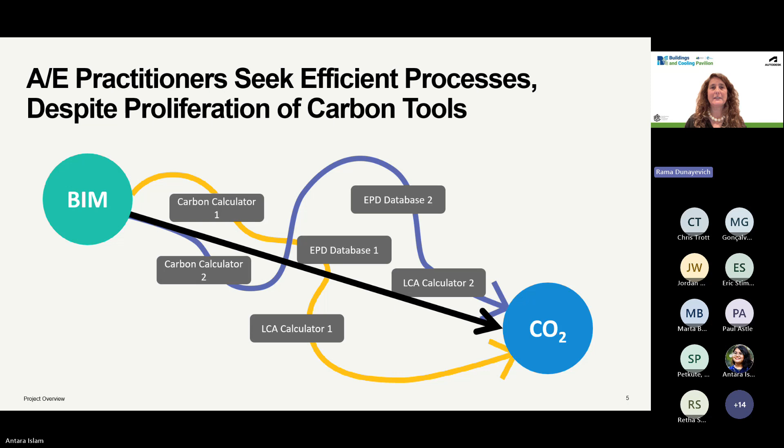Now to the specifics. Architecture and engineering professions are looking for the most efficient methods to connect BIM models to embodied carbon. Today we have many tools, data sets, and calculators, which result in many paths you can take to get to BIM to carbon assessments. However, practitioners really just want an efficient, streamlined path to get from A to B, not to explore the many paths that exist in the industry.

Which brings us to this project, which we developed, as I mentioned, under the auspices of the WBCSD. First, we developed a proof of concept to unpack the various ways that these 6 global architecture and engineering firms approach embodied carbon assessments and measurement. By analyzing the same Revit BIM model and sharing the details of their specific workflows and processes, we discovered opportunity areas for better alignment across the firms. And building on that discovery, we're excited to share our learnings with you and the industry today.

I just wanted to give a little context also to the WBCSD, the World Business Council for Sustainable Development, and I'm sure you'll be hearing from them many times during COP. It has a membership of about 250 companies, and those 250 companies represent about 25% of global greenhouse gas emissions. So the opportunity to work together with members and non-members to do this project was incredibly important.

You've seen the companies involved, but we also wanted to show the people behind the work. As you can guess, this was a massive effort across multiple stakeholders, across multiple geos. You'll hear firsthand today from a subset of this terrific cohort, comprised of some of the leading experts in decarbonization. This level of expertise is exactly what's needed to help collect, synthesize, and extract the data needed to formulate best practices that will help not just those in the cohort, but all of you working in the industry.

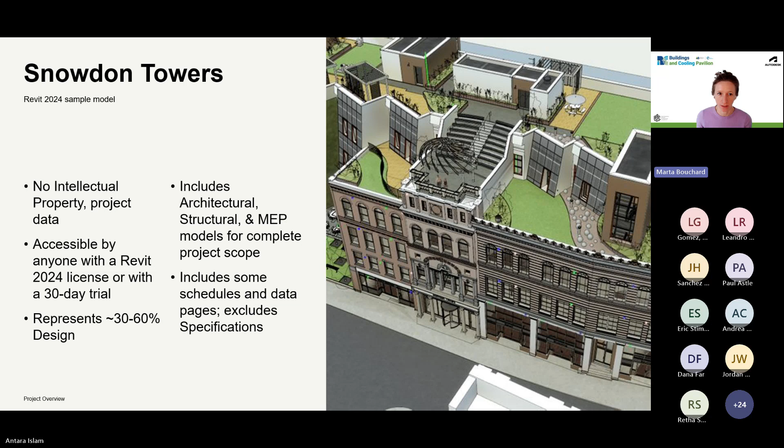So let's jump into the work. In order to achieve the outcomes we're about to share, we did need to ground our work in real models and real workflows. So we decided to use the Revit sample model called Snowdon Towers for several reasons, which you can see here. Although we selected a Revit model, our findings can absolutely be applied to any BIM software.

We also needed to align on a reporting framework structure. And for this, we used the Royal Institution of Chartered Surveyors, or RICS, Whole Life Carbon Guidance to structure the carbon assessments you're about to see. This provides a real industry use case for the carbon data being extracted and assessed by this group. And just like with the BIM modeling tools, our findings are actually agnostic to any specific reporting framework and could be applied to any reporting structure.

So we get into the fun part. What did the results of our efforts find? Here's a quick recap from the initial proof of concept, going back in time about a year and a half.

As a summary, we see each of the cohort's firms represented as a single approach on this view, where the y-axis is a measurement of embodied carbon for just the structural scope. I want to be clear, this is not a whole building. It was structural systems which were selected as high impact carbon scope.

Each of the bars here corresponds to the RICS categorization of reporting data. We have 7 approaches because one firm actually applied 2 different approaches to the data, resulting in slight variations even within a single firm.

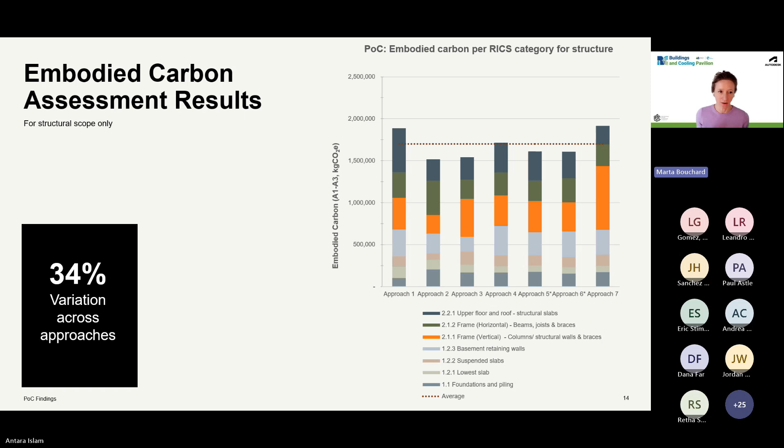Now, what we found is a 34% variation across the results. If you zoom out from this, you can imagine how this has a huge implication for carbon regulations that rely on benchmarks, carbon intensities, and corporate commitments to net zero, which rely on offsets or other things for carbon impact factors.

Now, what you see here on this slide is last year's resulted work, where we have 6 key areas of discovery explaining why we saw such divergence across the 7 approaches.

We identified key elements of an embodied carbon assessment process: the fact that the data structure maps from BIM software to a reporting framework, variation in identifying the spatial boundary of what is even assessed, how a model can be post-processed and then fed into material takeoffs, assumptions made around non-modeled elements, and different approaches to selecting embodied carbon factors.

So this was the baseline of all of our learnings. You can read this report, the first report, for details, but this is critical. It serves as our jumping off point for phase 2, which you're about to hear about.

We are going to go deep into the how. We went back, we interrogated our work and understand what caused that 34%, and we want to better understand our processes and workflows so that we can seek alignment across our firms and design best practices. With that, we're going to jump right in. What can we do to reduce the variation?

Welcome to phase 2. We're taking those learnings from phase 1 and moving into phase 2, which goes deeper into the disparities in finer detail so that we can get recommendations and guidelines for you all.

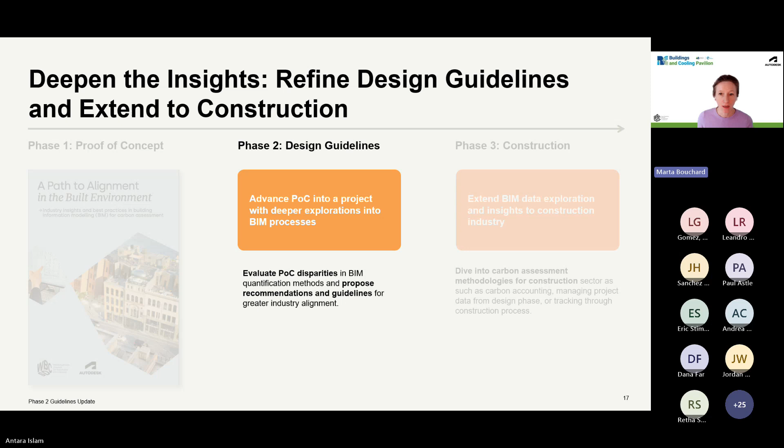So kicking us off, we are going to talk about the why in this variation, and we interrogated the root causes for the variation I just presented. And we're going to introduce guidelines for how practitioners can get started in BIM on the right foot and with the end in mind.

Today, we've structured our findings into 6 categories of recommendations, and if you listen very carefully, you'll actually note that while we tried to create clean categories, not everything fits neatly into each bucket, and there's going to be some overlap and recurring themes.

And while everyone collaborated across all themes, each firm is presenting one of them today. We'll be handing off, and I will be teeing up each section according to these 6 as your moderator today.

Starting with the first section, preparation for carbon assessment. What can we do at the beginning to prepare for a carbon assessment? So in phase 1, we focused on a use case.

We looked at carbon phases for scopes A1 to A3 for a fairly detailed model. But if we extrapolate to multiple use cases across many phases of a project, it introduces even more potential for variability. So to get started, here are the guidelines that can help you set your path to prepare for carbon assessments. And I'll hand it over to Sandra.

Thank you, Marta. So we begin this section with a focus on preparation, because how we frame and scope an assessment directly shapes its consistency, transparency, but also its outcomes.

So while our cohort teams understood carbon scope really well, we still saw differences in how spatial boundaries were set and how non-modeled elements were handled.

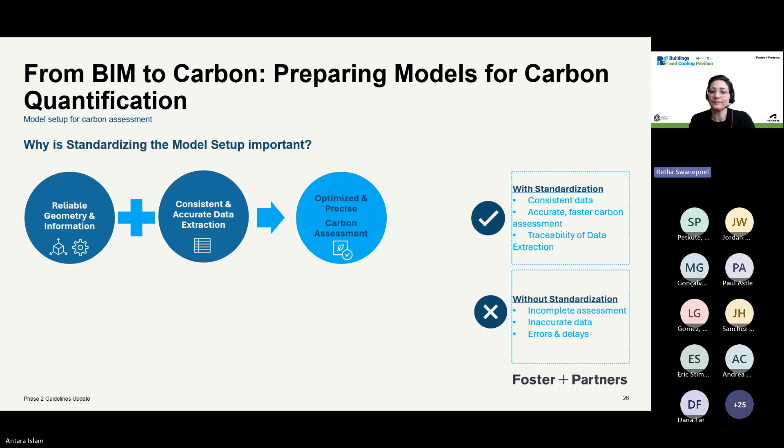Next, please. Before we dive into explaining the model setup process, it's important to understand the broader context of the BIM to embodied carbon assessment workflow. It consists of two key stages. The first is model setup, which takes place inside of the BIM environment, and the other is post-processing, which occurs outside of the BIM environment, but is highly dependent on the accuracy and quality of the model setup.

Now, focusing on model setup, this stage includes data integration supported by an iterative QA/QC process for both geometry and metadata. Once the model is verified, we move into setting up a data export template, preparing information for post-processing.

But before integrating any data, it's essential to define the scope of the carbon assessment, as Margarita said. This is typically managed through filters or custom parameters, enabling easier visual inspection and scope clarity.

In line with the model element responsibility matrix, any placeholder element from other disciplines can be placed on designated work sets. This allows for better model quality control during early design stages.

All integrated data should follow a standardized structure with uniform naming conventions, hierarchical consistency, and complete 3D geometry. This also includes correctly assigning both predefined and custom parameter fields, such as consistent naming of families and types, clearly defined materials, and accurate element buildups.

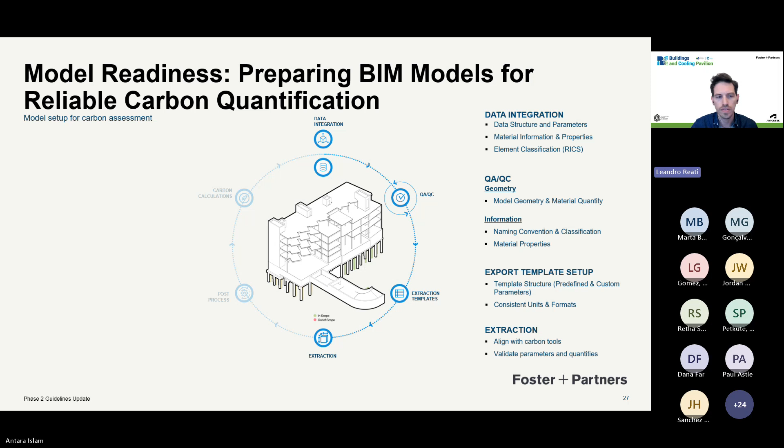In conclusion, to achieve and maintain a reliable carbon assessment, two things matter: geometry and data integrity, through consistent geometry, accurate materials and quantities, and consistent data tagging. And this leads to the second important thing, which is export integrity, where gaps and errors are detected early, data is verifiable and traceable to source, and exported data is validated.

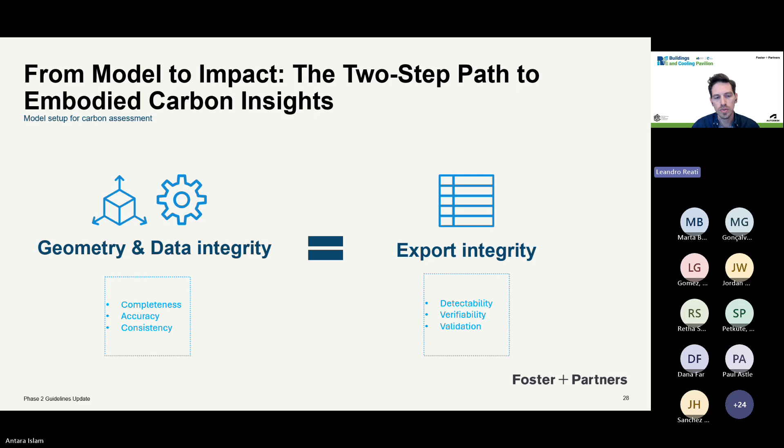Thank you. The final important matters about the model setup for carbon assessment are the model's federation strategy and the export templates. In daily practice, one of the main challenges of exporting data from digital models is dealing with large and complex project scenarios, where the federation strategy involves multiple models shared across different disciplines and several stakeholders. Each design branch may also have further breakdown according to the area of the project or its subdiscipline.

In the case of the structural engineering field, for example, a common subdivision of the model is according to macro groups, such as the roof model, the superstructure, and the substructure. Here comes the importance of having a good export template.

Ideally, it is a Revit schedule where you collect the important and relevant data that you need for the carbon assessment. As mandatory parameters, we would recommend, at least as good practice, the RICS categories in order to facilitate the mapping according to the report framework, the materials assigned to each element, and the quantities, in this case the volume, which will be automatically calculated from the software.

So, in conclusion, why is it so important to have an efficient export template? Because the main reason it ensures a structured, consistent, aligned dataset, and it is also a good chance to run a final check and make sure all the information provided is correct before the final export.

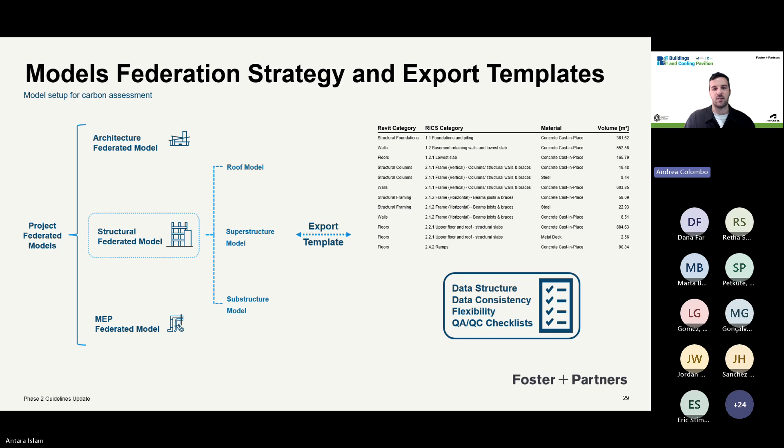One large area of discussion identified in the first phase of this work was the fact that some elements in the model would appear in multiple discipline deliverables, such as architectural and structural. This creates a gray area of which model to defer to, especially if that's not addressed clearly and transparently across project stakeholders. I'll hand it over to Eric from SOM, who will talk about exactly why this is tricky.

It's fairly common for elements to be modeled more than once, so let's get that out of the way up front. It's going to happen in your project. It could be different disciplines or even within different models from the same discipline. As Marta mentioned, we found this to be true in the models we used for the POC. Obviously this is a problem if we intend to use the quantities from the models for things like cost estimating and carbon accounting.

As you've already heard, the setup of a project is important. It will provide a framework for the team to do things the right way. One of the things they need to be prepared to do is deal with overlapping elements. So first, know that this is a common problem. In some cases this will be pure duplication of elements, and in other cases it will be a partial overlapping. Both of these are problematic, and I'll show you a couple of examples in the next slides. But regardless, you need to be aware that this is going to be a problem at some level on your project.

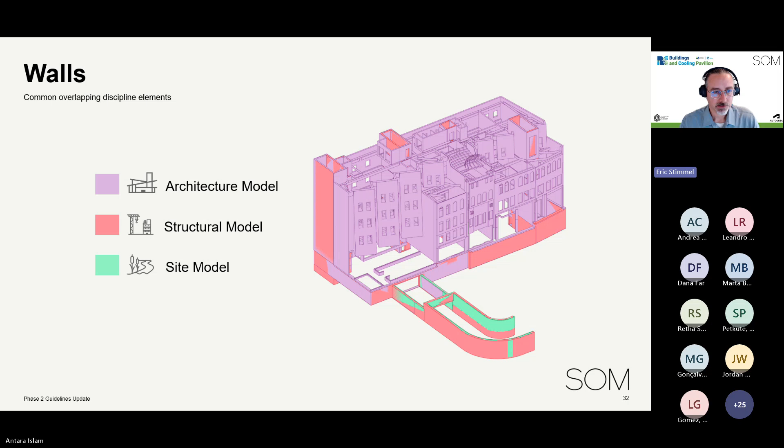In our sample models for Snowdon Towers, there were notable overlaps for walls between architecture, structure, and the site model, as you can see in this colored view. In some of these cases, these were exact duplicates that were easily filtered out, but in other cases, like the entrance to the underground parking, these overlapping walls were different thicknesses by 6 inches. So some care has to be taken to use the right walls and to understand if the difference is significant, and it should just be accounted for in a different category.

We also found more irregular overlaps for floor elements between the architecture and structural models. These were cases where the intent of the architecture model seemed to be to show the floor finish, but the floors also included the structural slab. So these compound elements have to be discounted as part of a quantity takeoff. Although there weren't overlaps with the site model per se, there were floors in that model, and there was even a floor in the electrical model. We didn't see many of these in this set of models, but non-structural equipment pads and sometimes walls can show up in other discipline models, which needs to be accounted for as well.

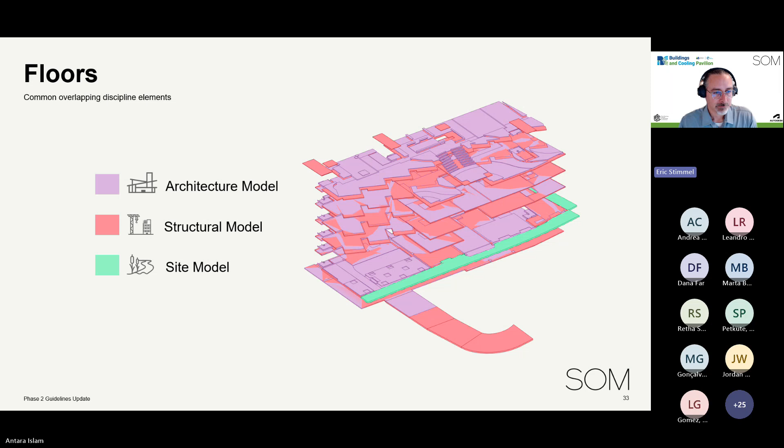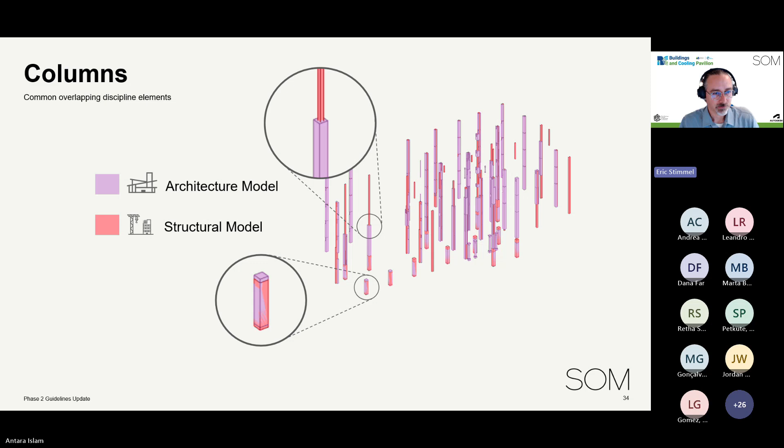We had overlaps of columns between the architecture and structure model. In many cases, the architectural columns are furring around the structural columns, and both needed to be accounted for, just not as columns. But in other cases, these looked like duplicate elements that should just be excluded from a quantity takeoff.

So of course we want to avoid this issue as much as possible and only have one party model each element. Fortunately, we already have a strategy for this in the form of the model element table. This is an example of the AIA document, but you'll see this in other forms on other projects—we have the same concept. We could even take this one step further, and in addition to identifying the model element author, we could identify a carbon data responsibility column.

That would help emphasize the importance of this data and allow for these two things, the model element author and the party responsible for the carbon data, to be untethered from each other if needed. So there are plenty of strategies for working through this in the models, and we've seen a couple of simple visualizations using built-in features of Revit.

I would strongly encourage visualizing this in the model with filters or something like that. This is what models are good for, but there's also other ways to check for duplicate overlapping geometry, including warnings, interference detection,

third-party add-ins. But clearly identifying the responsible party is going to take you a long ways to clarifying this information. So while floors, walls, and columns are particularly notable, other elements could also be double counted if we're not careful. So here's a short list of elements to pay particular attention to. Thank you.

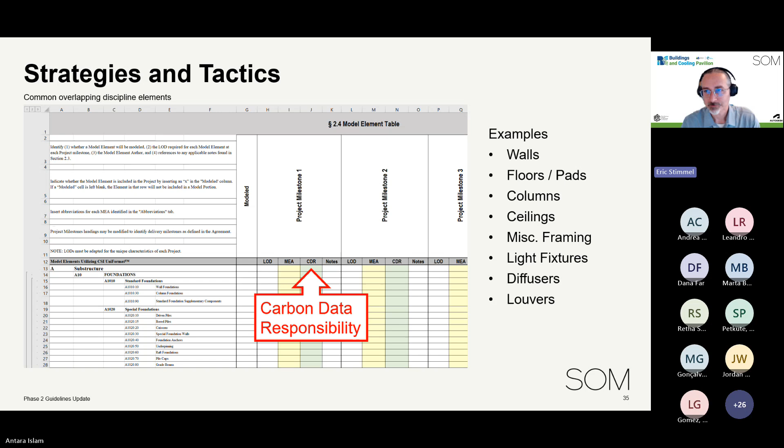So this group discussed non-modeled elements at length because we know there are several reasons elements may not be digitally modeled, such as the rebar in concrete or the studs in walls. When there is no element representation in a model, that introduces room for interpretation, assumptions, and therefore variation. You're now going to hear from Ramboll to discuss some guidelines for how to address common non-modeled elements.

Thanks, Marta. Yes, so we've heard about what happens when you have more than one element, but now we're going to talk about when they're not modeled at all. So just to define what we mean by non-modeled elements, we're talking about any material or component which is present in the actual construction but hasn't been captured in the model.

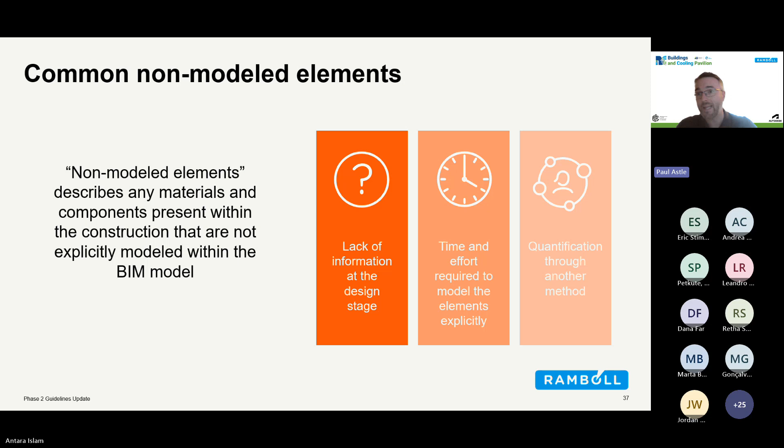And there can be a variety of reasons for that. There may not have been enough information at that design stage. It may take too much time and effort to actually capture those elements in the model. It just may not be worth it. Or indeed, it may be already assumed or planned that those things will be captured through a different method. So many different types of reasons and many different types of elements are within this category.

So the issues that we have as a result of that is that these elements can account for quite significant quantities of materials. We'll hear a bit more about that in a second. And as a result, they can be overlooked from carbon assessments altogether. It's quite difficult to know what's not there if you're not expecting it, of course.

And then when it comes to the actual pitfalls, one of the key issues that has to be addressed is who's responsible for these elements. We just had a great example from Eric there about identifying who's looking after which elements, but we also need to identify who's not modeling those elements, if that makes sense, and how it's going to be captured separately.

We also need to look at the functional units that are used, because if it's not going to be captured in the model, it has to be captured somewhere else. It's really important that we use the right units, and those are the consistent units in the way that we capture it separately. And as a result of all these things, there's a big opportunity for risk and for variability in the assumptions between assessments, assessors, and firms. So this is a really important area that we need to get more consistency on across the whole industry.

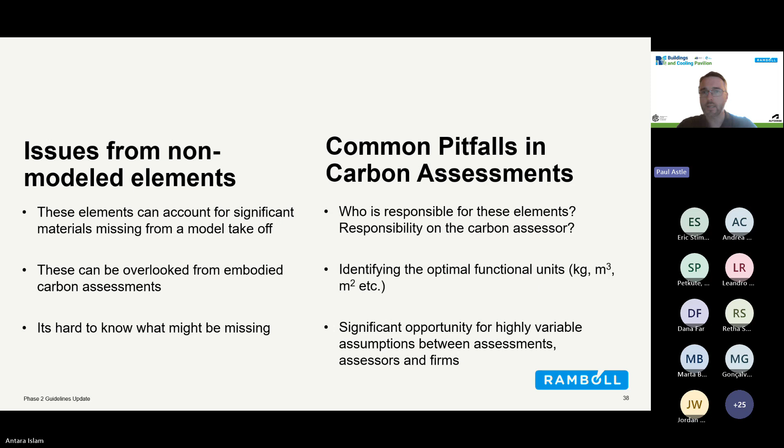Next. As a few examples here, we're going to focus in on the structures to begin with, just because a lot of the focus in this round was the structural model. So a few classic examples, the main one being reinforcement. It's quite unusual to model reinforcement. In Ramboll, our Norwegian team does model it, but it's quite rare.

And so as a result, most people treat reinforcement as a ratio of the concrete. And of course, that invites errors because it depends on what factor you use for that ratio and whether you take into account other factors as well as the units that you use to do that.

There's also things like steel to steel connections or steel to wood or indeed steel to concrete connections. They are rarely modeled because of the numerous number of them, as well as the fact that they're quite complicated. So again, this can be an area where they're not captured at all and they're used as a ratio of the steel tonnage quite often. Then there's things like steel decking or proprietary elements.

These are sometimes modeled as an indicator in the model just to make sure they're captured, but the thickness of the element may not be there. And in fact, that's what we found in this model. We had the actual element was captured, but it had zero thickness. And so this is a really good example of things which are partly captured, but not fully in a model. And that means that you have risk of misinterpretation that needs to be addressed.

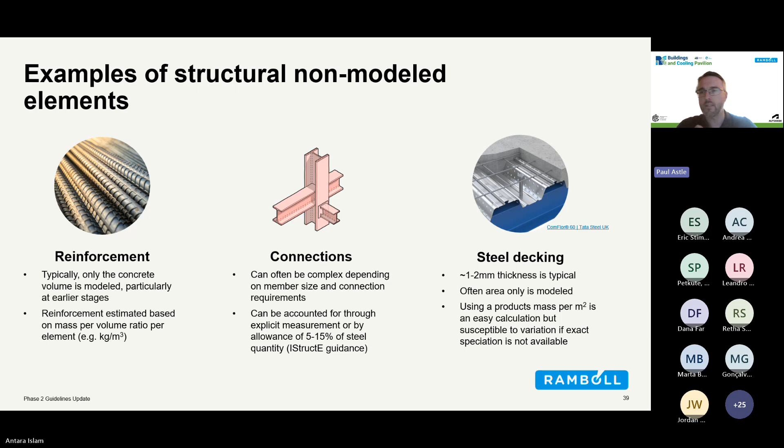A few more examples here as well. So going beyond structures, there's also things that have multiple layers. So for example, if you had a ground floor slab and it might have a membrane and then maybe some insulation, etc., often those things aren't necessarily modeled and they can be lost. There's also a situation where we have things like internal partitions or ceilings, again, that might have multiple layers, or they might have secondary systems to support them, and they often don't get modeled because it's frankly too much effort to model them and there's not enough justification.

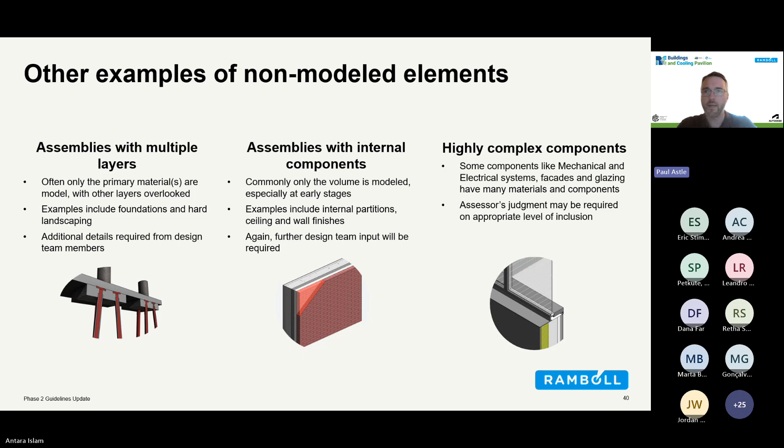But it's important that we capture those materials separately. And then there's just things that are very, very complex and just not justifiable to model at scale. So again, all these things we need to be thinking about when we're developing a BIM model and recognize that it's not a perfect model of what's actually built. So when it comes to carbon, we've got to fill in those gaps as required. Next slide, please. So what are the impacts?

Well, in this particular example of Snowdon Towers, we worked out that around 5% of the structural mass was in these non-modeled elements. That's the rebar and the connections, etc. But that 5% of mass accounted for 20% of the carbon. So that's a really significant amount of carbon if you're not capturing it properly or indeed consistently. So really important that we pay attention to this.

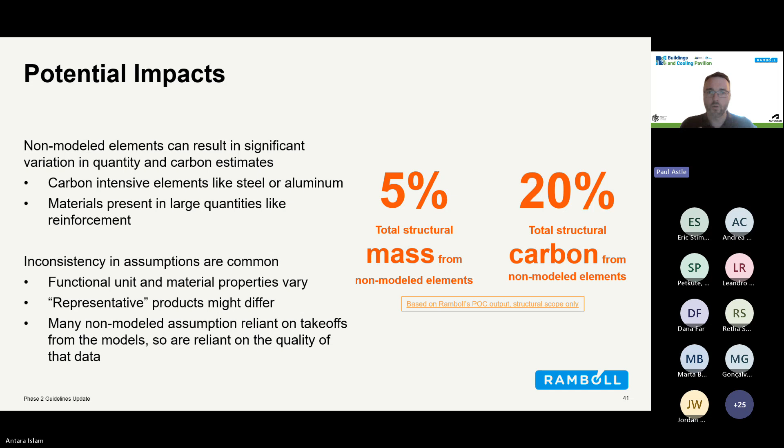One of the things to be aware of is that it's often the high carbon materials which don't get modeled because they are the sort of connectors between different components. So these are important things. They're high carbon. It may seem like a small mass, but actually it makes a big difference. We also saw a lot of inconsistency in the functional units used and the ratios, etc. So very important to think about all those different things.

In terms of what we can do to address this, there's three key areas: transparency, consistency, and collaboration. Transparency is really, really important. We've got to be very clear on what is modeled and what isn't modeled, and really make sure that everyone in the whole team understands that. We've got to be consistent with how we're going to address these non-modeled elements. Is it going to be a factor? Is it going to be something else? How are we going to make sure we have the same units, etc.?

And then we need to make sure we really collaborate with every member of the team. The architect, the engineer, the modeler, the designers, the assessors, they all need to understand what role they have in tackling non-modeled elements and make sure we all do it as consistently as possible. Thank you.

So coming to the next section, we did do quite a bit of unpacking, line by line of Excel exports and many discussions. There were several common pitfalls, some that were straightforward and some that took us by surprise. Some were tied to larger scopes of misalignment, and others were as small as precision of the settings in the BIM schedule, something as small as a rounding error or unit conversions.

In the next section, AECOM will share some common pitfalls for misalignment and a checklist to avoid these missteps.

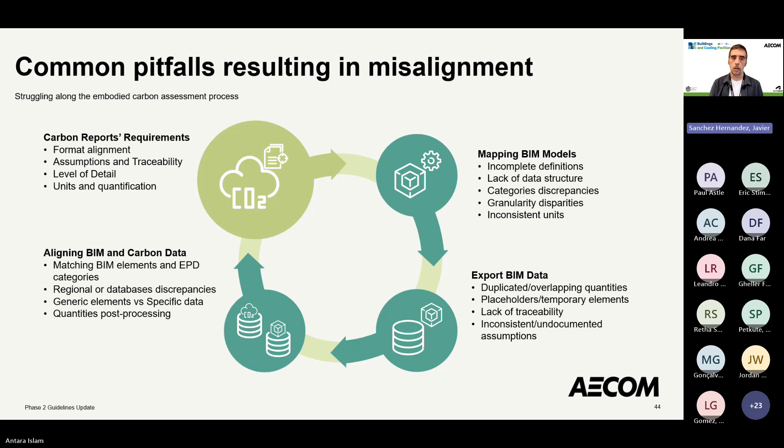Thank you, Marta. In this chapter, we are looking at some key challenges when calculating embodied carbon using BIM models. First, the format of carbon reports heavily influences how BIM data should be structured. Reports often require breakdown by system, material, or life cycle stage, and demand a traceability of assumptions. Then, within the BIM model itself, problems arise if it wasn't properly set up. Low data levels, poor classification, or mismatched categories like modeling a roof as if it was a floor can reduce the accuracy of the assessment. Inconsistent units also add complexity and risk.

During data extraction, errors like duplicated quantities or counting placeholders can distort the results. Without a clear traceability, it's hard to validate or reproduce the findings. And finally, aligning BIM data with carbon databases is another challenge. Matching quantities to multiple sources often requires heavy post-processing. Even well-structured exports may need rework to link elements with the correct EPDs.

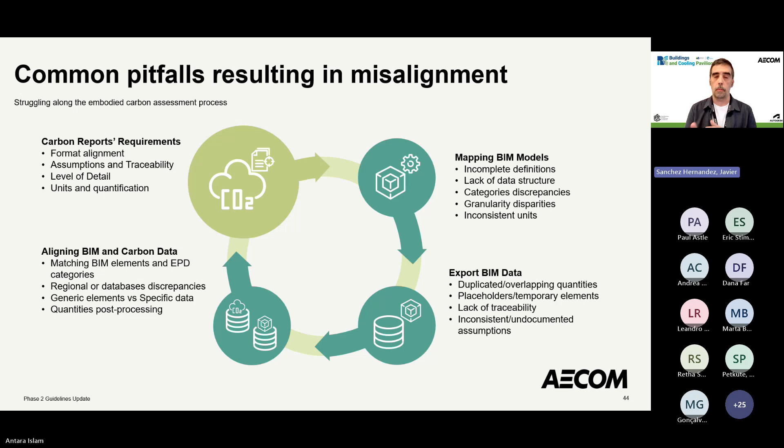Ultimately, the quantities post-processing effort will depend on the type of BIM element. The accuracy varies between elements, and some parts might need more refinement outside the BIM model.

Think of a concrete slab, a beam, or a column. When calculating carbon for concrete elements, we usually rely on volume, the most common unit used in carbon databases. If these elements have been properly modeled, we can easily get a pretty accurate carbon calculation, taking into account only its geometric properties in a straightforward way.

But what if, instead of a simple concrete slab, what we have is a metal deck floor? In most cases, the metal deck isn't properly modeled in BIM. Usually, we just see a basic extrusion of the slab footprint using the maximum thickness across the entire element. As the quantity comparison shows, calculating carbon directly from that model would inflate the results by nearly 30%. This is where post-processing becomes essential to ensure the accuracy of the assessment.

Up next, my teammate Laura will share some practical tips and best practices on how to avoid or work around these common pitfalls.

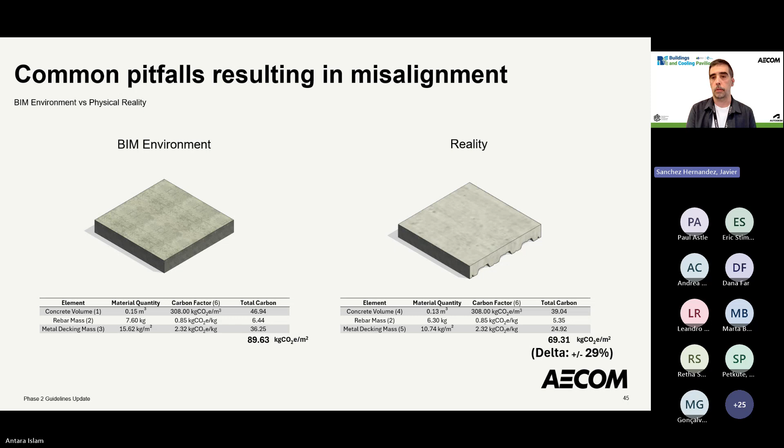Thank you, Javi. A successful carbon assessment is the result of the cross-collaboration of two key project roles, the BIM specialist and the carbon assessor. The rest of the stakeholders and team members also need to be aligned so the result is accurate and complete. So in this slide, we can see in a few moments... there we go.

So in this slide, we can see that there are a few interconnected factors that need to function precisely to avoid the common pitfalls highlighted before. The first one, as already commented on in the POC by the cohort, is that the carbon assessor needs to make sure that the priorities and the framework of the assessment are set.

Then the BIM specialist can engage with the team and ensure the model is properly set up. It is key to establish clear modeling protocols to ensure, for example, consistency in granularity, consistency in units and materials, and uniform naming of elements and layers.

One of the critical steps in the process that can be overlooked is the check and validation of the structured data against the model geometry. A visual inspection and cross-checking of the structured quantities against the BIM model is key to identify duplicity of elements or modeling gaps. Next one, please.

Another common pitfall is that the reporting categories classification does not normally match directly with the default categories in the BIM environment. To address this, it is recommended to add additional metadata to the BIM model. For example, in the POC exercise, an extra parameter was added in BIM to map each element to its corresponding RICS category. It is also recommended to develop a visual strategy.

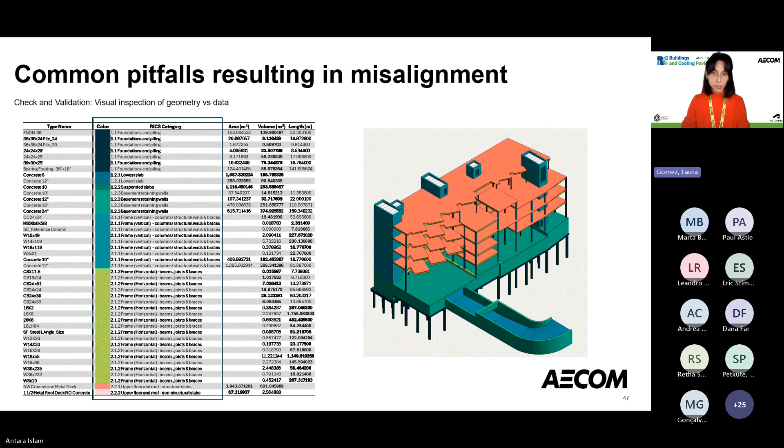The goal is to provide an intuitive way to perform quality checks on the data that has been exported. It can be an actual color diagram, like the one we are seeing in the slide, or any other kind of data visualization, like a dashboard, for example. Next one, please.

As a summary, we also wanted to provide you with a quick checklist that includes best practices to avoid these common pitfalls. The first one would be to structure the BIM model to include information down to the individual elements, while filtering out generic items, placeholders, or detail lines.

The second point requires setting up in advance the units and the categories in the BIM model to align them to the reporting framework. The third one is paying special attention when calculating the area for carbon standardization.

The fourth point would be trying to use local or national carbon databases, just to avoid additional calculations during the post-processing. Another important item is to be aware of the difference in numeric formatting depending on the region, as not doing so can lead to misinterpretation of the values.

Finally, it is important to acknowledge that the BIM software may have limitations. So when the geometry does not have enough information, it is advisable to enrich it with data.

So if we were to highlight one key idea, it would be the importance of letting the specific reporting needs guide how the BIM model is organized, as this will definitely shorten the post-processing, and in doing so, minimize the chance of human error. Thank you.

Amazing. Thanks to you both.

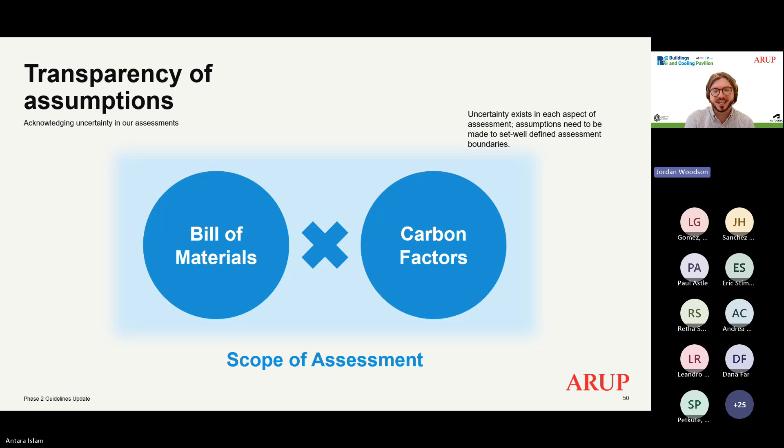And assessors have to make strong assumptions to be able to sharpen these boundaries, to really set the stage of what they're going to assess and define those limits.

And if we start to think about it, a BIM model is great at quantifying what we've populated in the BIM model for quantities of materials, and we can assign materials in BIM. But there's a lot of data enrichment and refinement that needs to go into a BIM model at the end of the day to let us get to a bill of materials that is appropriate for a carbon assessment.

So we might have to account for non-modeled elements. We might have to group the data in BIM in different categorization buckets for RICS or ISO. The materials might be well defined by volume, but we actually know a carbon assessment factor by the quantity of that unit on the MEP side. So there's a lot of gray zone that has to take a BIM model and actually turn it into that carbon assessment. And in all of that light blue area, assessors are making assumptions that they need to define.

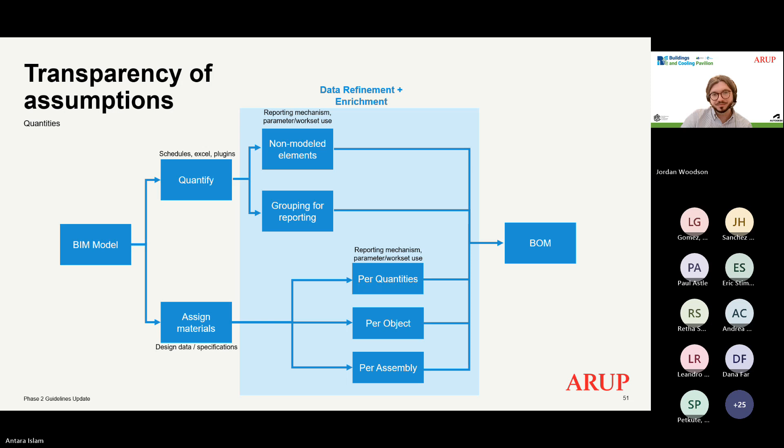Next slide. And if we think about the carbon factor side of the equation, we don't have carbon factors for every material or product we want to use. So we're in a realm of having to pick what's most appropriate or what's available for what we have. And so that might be reflected by a carbon factor that's a global average, a regional average, an industry average, or we might have the exact product's EPD. But each of these carbon factors we're picking from has a different distribution of how, quote unquote, accurate it will be.

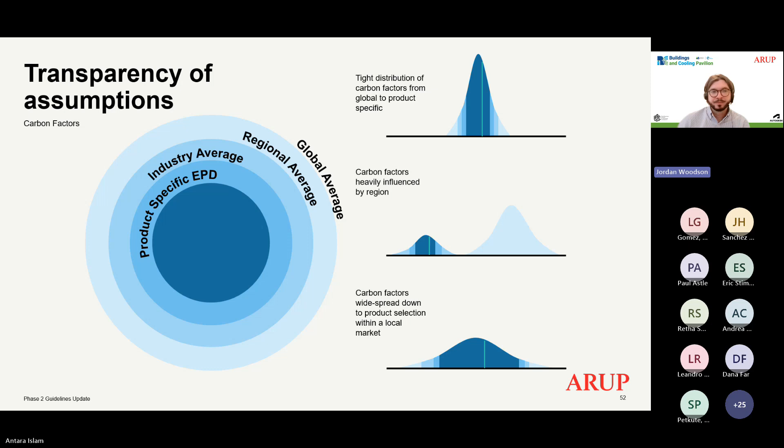Some global averages, if you can go to the previous slide, in this top diagram reflect a tight distribution where a global average would reflect a product-specific EPD really well. Some factors are heavily influenced by region, highlighted in the middle slide—an example of this is steel, depending on if your country produces steel with a basic oxygen furnace or an electric arc furnace. And last, we might have products that are all over the map, and you're not really going to get a good definition without a product-specific EPD.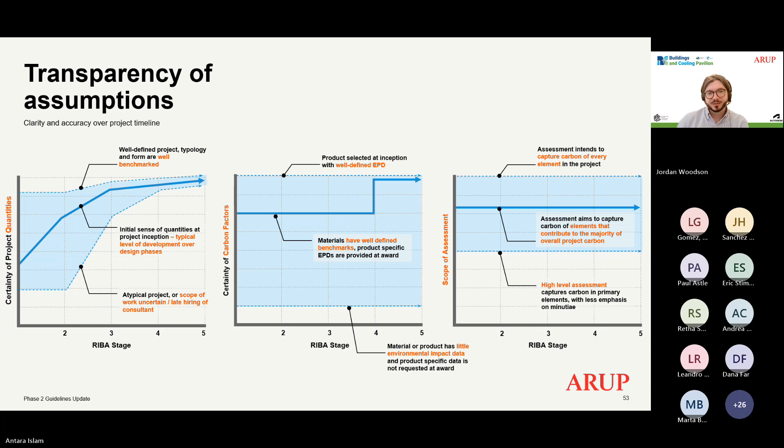We can jump to the next slide. There's a few click-throughs here.

Let's go over some quick examples on the power of assumptions. A BIM model might tell us that there is a 90 millimeter thick concrete slab over a steel structure that has 30 kilograms of steel per meter squared.

An assessor may say, okay, that slab is lightweight concrete. I think the deck that supports the slab is 1.2 millimeters thick, and the steel is procured from a basic oxygen furnace, and I've arrived at a carbon value of 150 kilograms per meter squared of CO2.

But the reality might be a normal weight slab, which has considerably less carbon. The deck might only be 1 millimeter thick, and the steel might be produced by an electric arc furnace. That would actually drop the carbon of that floor plate down to something closer to 97 kilograms of CO2 per meter squared, which is almost a 50 or 33% difference depending on how you cut it.

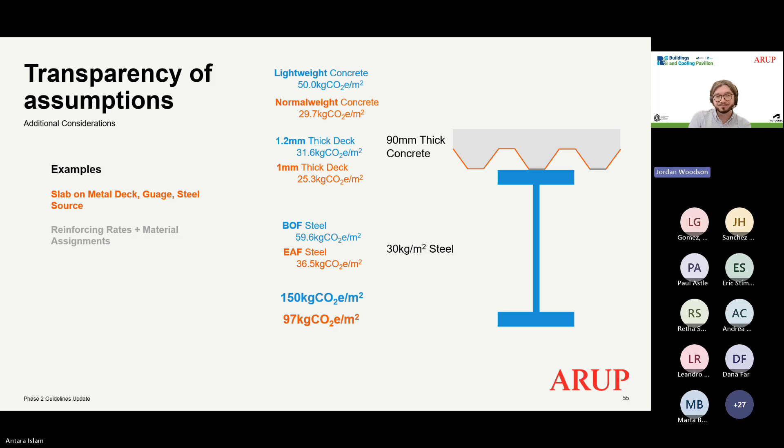Similarly, you might model beams and slabs for a concrete structure in BIM. They get joined in BIM, but ultimately the quantities we extract either assume, on the left, that the beam is the segment of concrete just under the slab, or on the right, where the beam takes priority and displaces the slab quantities.

On the left you would get sort of 0.45 meters cubed of slab, 0.15 meters cubed of beam, and you might assign reinforcing rates that are fairly low in that perspective.

The contrast would be a slab that has less volume and a beam that has more volume. You might also say the assumptions were wrong on the reinforcing, and this is actually a heavily reinforced slab and beam. Again, you're yielding results that are about 10 to 15% different when we're ultimately, for LEED or other requirements, seeking 10% reductions.

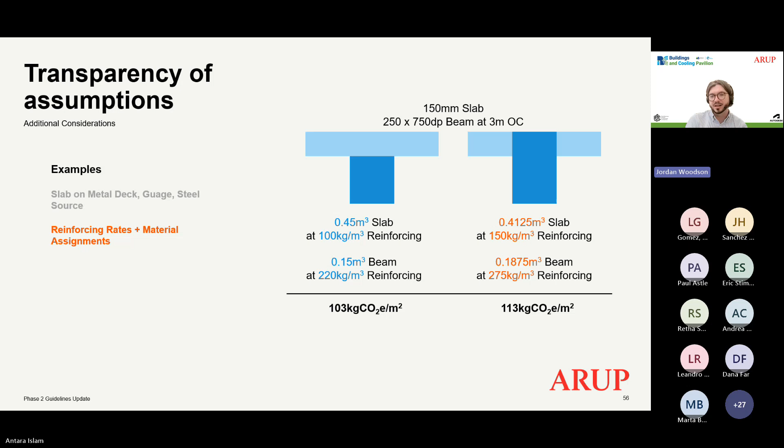So the ability to introduce error here is high unless we're really explicit about what we're counting and how. Within the deck, we've highlighted ways to document your assumptions as you move through, based on all of the different things that we've noted from all the previous presenters.

So I'm going to bring us home. You've heard from all of these folks about what we've learned, and we've compiled recommendations and checklists shared today for the industry to reduce variation in embodied carbon processes as they relate to BIM. Now we're going to go back and compare to our first round of work and see if we can put our own best practices to purpose and see the results.

So I shared this image before. This group applied these guidelines that we presented today to reassess the work. As a reminder, we're looking at the high carbon impact scope of structural systems, and we deployed these best practices. When we did this, the group demonstrated a variation from 34% to 19.6%. So we've cut this down quite a bit.

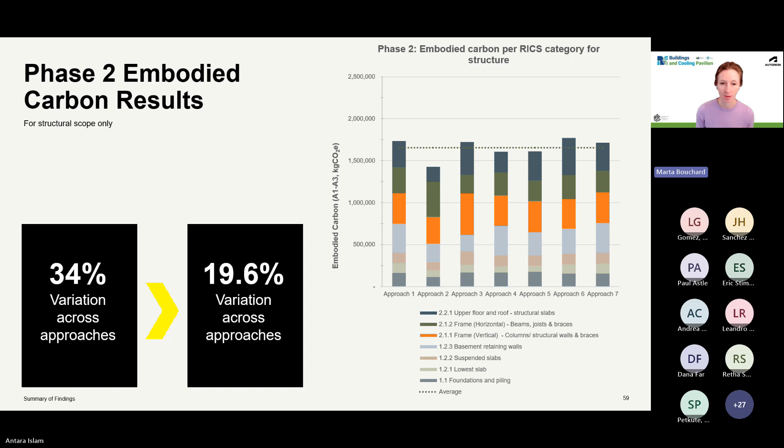On the next slide, we'll compare the results from before and after. In aggregate, we did see a 43% reduction compared to the first phase. This shows that when we are intentional about BIM processes and our workflows, we can directly reduce the uncertainty associated with BIM and inherent in an embodied carbon assessment.

But we did not get it to zero, and it's important to note that's because there are still many other factors at play. We could not solve everything at once. Technical guidance alone, which we're addressing here for BIM workflows, cannot address all the variation potential, and we want to acknowledge that additional alignment is still needed through continuous engagement by technology providers, policymakers, industry groups, and organizations that establish embodied carbon reporting frameworks. So compared to the proof of concept, the Phase 2 results we shared today demonstrate greater alignment in the quantity estimation for, in this case, concrete across the group.

However, the selection of embodied carbon factors, which were outside the scope of this alignment, are still a factor. Everyone selected their own carbon factor, which is a contribution to the variation in the overall results.

Although we were able to demonstrate a reduction in variance, we want to reiterate that the focus of this work was on the process of extracting quantities from BIM.

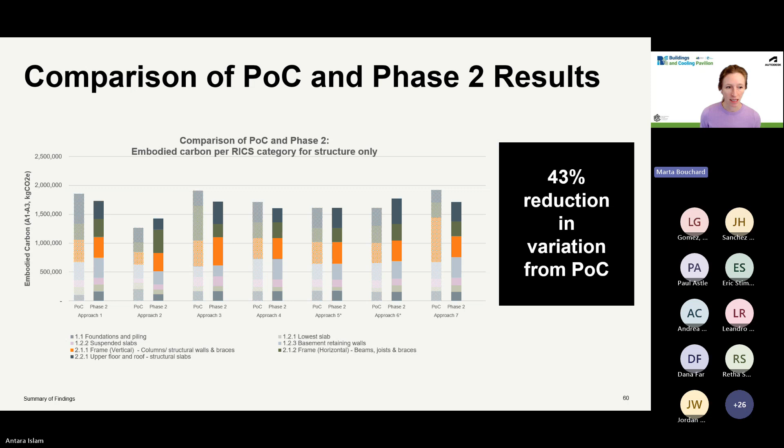Just to regroup, this is a triple click into carbon factors and volumes. Sorry for the misalignment there.

To bring us home, let me walk you through a summary of takeaways and guidance from each of the six sections that were presented today.

Number 1: identify key criteria of the assessment, including LCA scope, spatial scope, purpose, and the reporting framework.

Number 2: set up a model based on the criteria you set up in step 1, specifically the geometry and the associated metadata.

Step 3: establish a model element table with clear data responsibilities assigned to project stakeholders.

Step 4: address high impact, commonly non-modeled elements such as steel rebar, metal deck, and wall studs.

Number 5: address the common pitfalls, some of which we introduced today, like mapping BIM to a reporting framework, extracting the data, or mapping carbon factors.

And number 6: provide assumptions relative to the quantities, the non-modeled elements, and the carbon factor data so that everyone can know. These combined steps are crucial for communicating results transparently based on assumptions and inputs to everyone and all the stakeholders on a project.